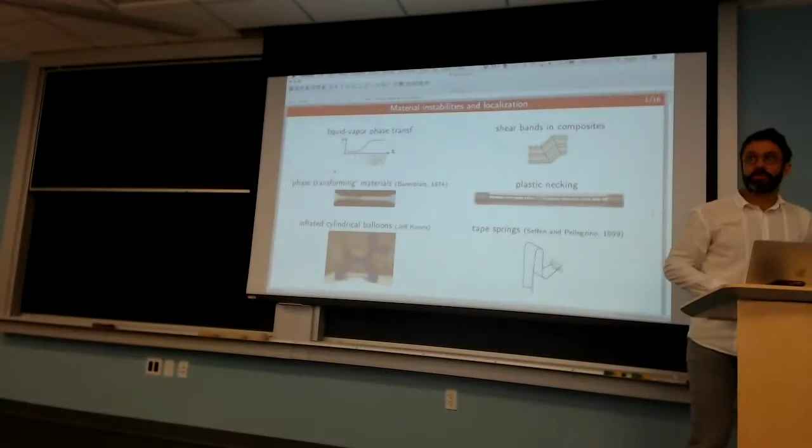Today's the last day where I'm dealing with moving out of my old apartment. It's not the same as the last day where I'm moving into my new apartment. There's just boxes everywhere.

So you already have the new apartment? Yeah, it's on Marine Road, just a block north of the 210. It's like a 15-mile bike ride.

What program do you use to make your slides? TeXmacs. TeXmacs, which I like.

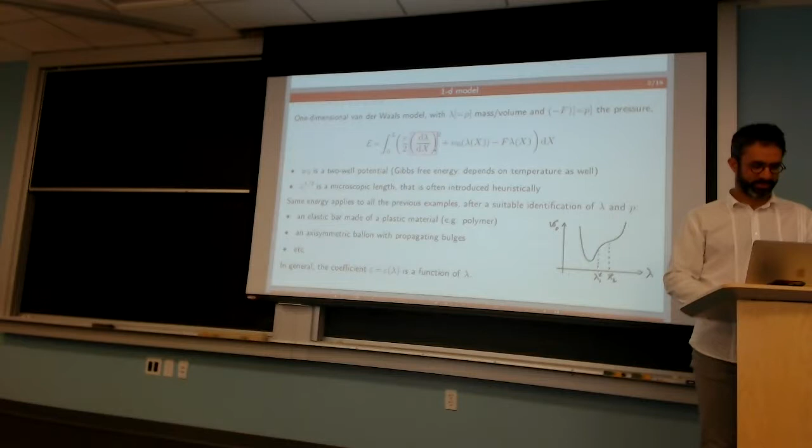The nice thing is that you can edit as you type. Is it just for Apple products? No, it's so you have accents.

Basically, it's a guy who rewrote LaTeX from scratch to make it interactive. It's not LaTeX, but the philosophy is quite similar. Everything is basically LaTeX, except that you have access to all the boxes, and you can make consistent selections that will always span a given level.

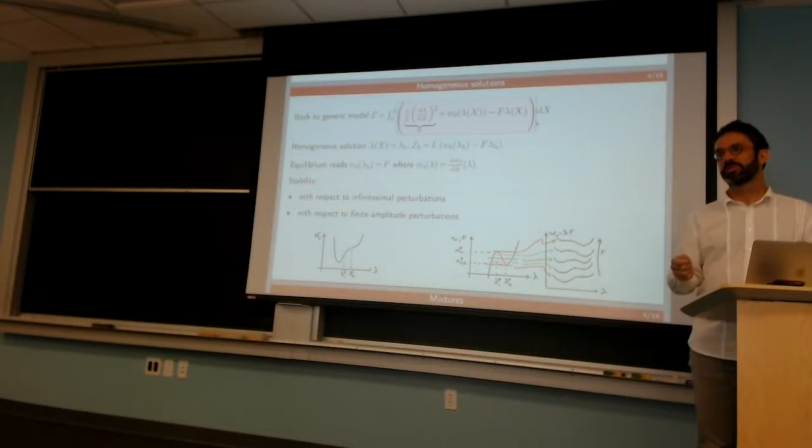When you write LaTeX, most of the time you're spending, when you try to do copy paste for instance, is identifying which level of thing. So yeah, it's really nice. I started using it, and now I'm almost converted.

It's also very nice for tables, because tables take alignment, and everything is handled automatically. But I'm using it for the first time for presentations - I use it most of the time for write-ups.

It's called TeXmacs, but Max is not Mac - it's like Emacs, so it's more of a unique thing. Actually, the weakest part of the software is the interface, which a different guy wrote, but the engine is incredible.

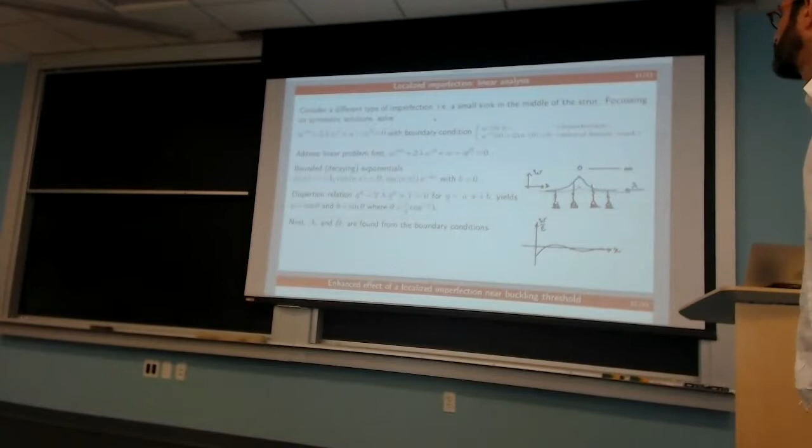I think I'm going to finish the lecture from last week to start with, which was about imperfection. It's loosely connected to the main theme of today - not strictly necessary, but nice to cover.

Remember last time we had the equation for a strut on foundation, where lambda is the load parameter, which is the pre-stress here. We were asking what happens when you have an imperfection. The idea of studying imperfection is that we're looking at a system that can bifurcate, so has zero stiffness, and there's a possible interaction between the imperfection and the bifurcation.

We use a nonlinear equation that's a simple way of capturing a system that can buckle, with an imperfection in the boundary conditions representing a strut that has a small kink. Epsilon would be a slope here, and then we need an extra boundary condition, so we just use the natural one.

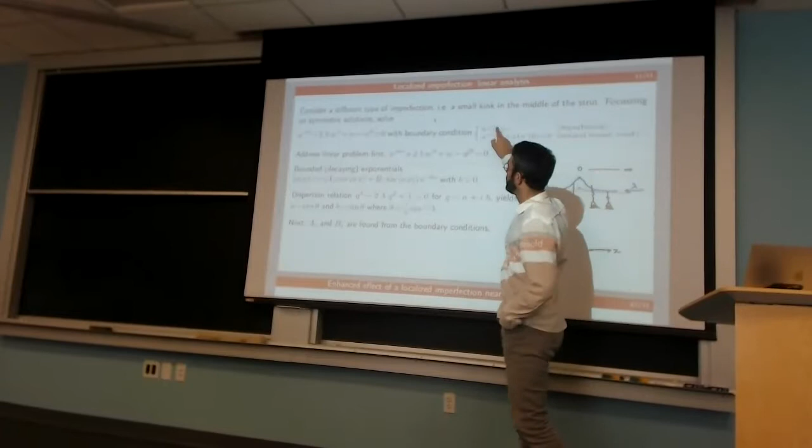Now we're considering a system assuming symmetry and considering half the domain, so the imperfection is in the boundary condition - that's our epsilon. We said we could start analyzing that by linearizing, which makes sense because epsilon is small. If you do that, you get an equation with constant coefficients, and you find exponentials, cosines, and sines, so you have the solution in this form.

So you can write the dispersion equations, etc. Typically that's the type of solution you get - you have the initial imperfection here that damps out away from the origin.

Now what's interesting is if you go to values of the loading parameter where the system spontaneously buckles, so taking lambda close to 1, you can analyze this solution. The important thing here is that the B parameter, which gives the decay length of the solution, is going to 0. So B is the inverse of the length.

Remember, eta was the expansion parameter in the Koiter expansion, and here we are with a symmetric bifurcation. In that parabola for the perfect system, eta would be the arc length. So the increment of load, which I measure on the y-axis on the bifurcation diagram, is the square of eta. So this eta here is just the square root of the increment.

So B, you can analyze, there's an explicit solution, so this B goes to 0, like square root of 1 minus lambda. So square root of distance to threshold, which I call eta.

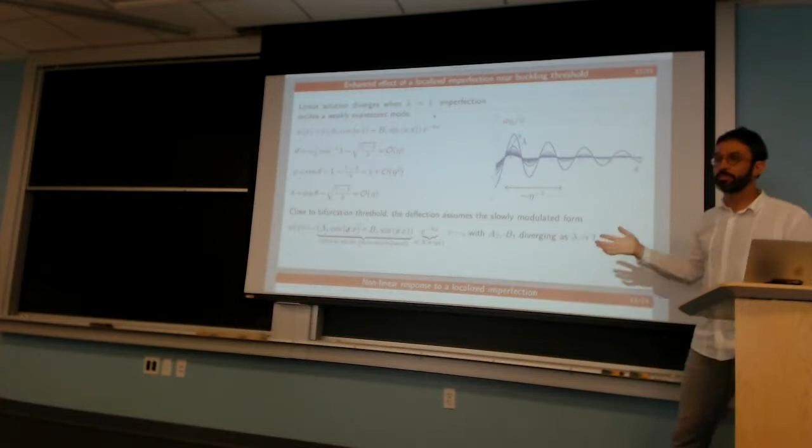So it turns out we've discovered this particular form of the solution in one example, but it's actually a very generic feature of systems that have an intrinsic length scale associated with buckling, that's the x here, and are much larger than this wavelength.

So we call that extended systems. Extended system is systems whose length L is much larger than the natural wavelength.

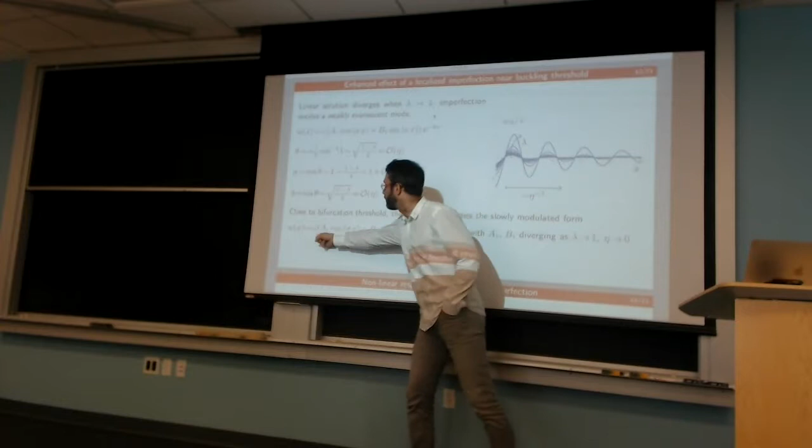And whenever we find an extended system, it will be, we'll see, I can give you a few examples that it's not sufficient to take the local buckling mode when you do post-bifurcation analysis. You must also remember that this buckling mode can be modulated by this slow variable.

Okay, so now I switch to the nonlinear analysis of this imperfect strut. And I could continue this reasoning and do the Koiter analysis, and well, this would be along the same lines.

But actually, I'm going to shift a little bit and use that idea of modulated solutions and port it to a slightly different context. So I'm now changing gear a little bit. And this idea is really at the core of localization.

And then as you compress more and more, you see that it tends to localize. And that's really the type of phenomenon that we can capture by this amplitude equation. I'll show you it's a simple generalization of the ideas we've just seen.

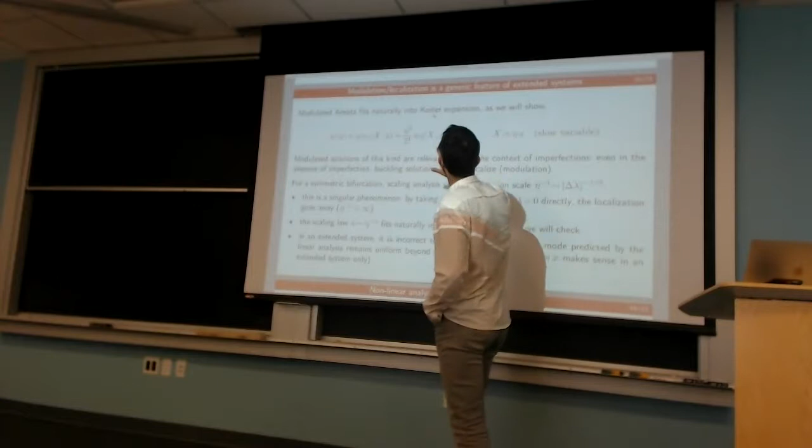So the idea here is that we seek the solution to our post-buckling problem in that special form, which is, again, specific to extended systems. In the extended system, we have the original variable x and the slow variable capital X. So capital X would be like that, where eta is our expansion parameter, you probably remember.

And if you want, in a non-extended system, we just have this. So now, this term will be essentially the one we just found, right? So this would be locally the buckling mode that depends on x times an amplitude that depends on capital X.

So that's the form we want to try in the Koiter expansion. So we generalize the Koiter expansion with that type of thing. Now you'll see, well, you have to think about it, how the expansion should be continued, but you can either do some test or some reasoning. Essentially, the expansion continues like that.

So the only difference with respect to earlier is that we introduce an additional dependence on this variable x, which is ultimately related to the original. And again, that holds beyond the context of imperfections.

I'm going to show you that even for a perfect system, it makes sense to use this kind of expansion, and you'll see the type of phenomena that are connected. So let's take this particular case of symmetric bifurcation for the strut, for instance.

The analysis we've just seen suggests we should use this form of the slow variable, so that we have a scale which is the inverse of our bifurcation parameter eta. As soon as you see this expansion, you see we're really addressing singular perturbation, because if you take eta goes to 0 here, this term would be 0, which doesn't really make sense. The passing to the limit is not a simple process.

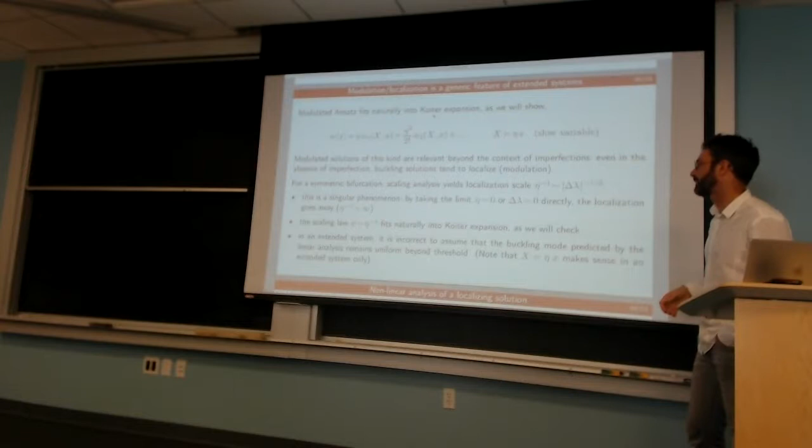So the point is that we had not considered that earlier, but that form is really what you want to consider in the Koiter expansion, and it fits naturally in it. Also, it's actually incorrect in extended systems to ignore this term, which you would naturally do because it seems to make sense. So let me proceed and show you now.

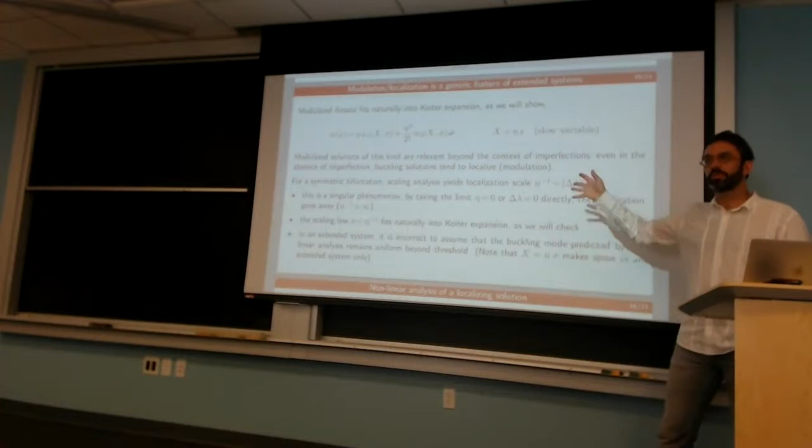So, Sergio asks: the W1 you might find as an eigenvector, for example? I'll come to that later, so it's a little abstract now. But essentially, W1 is going to be an amplitude depending on the slow variable times the local buckling mode depending on this one - pretty much like what we had.

The W2 also comes from analysis? Yeah, by pushing the expansion to higher order.

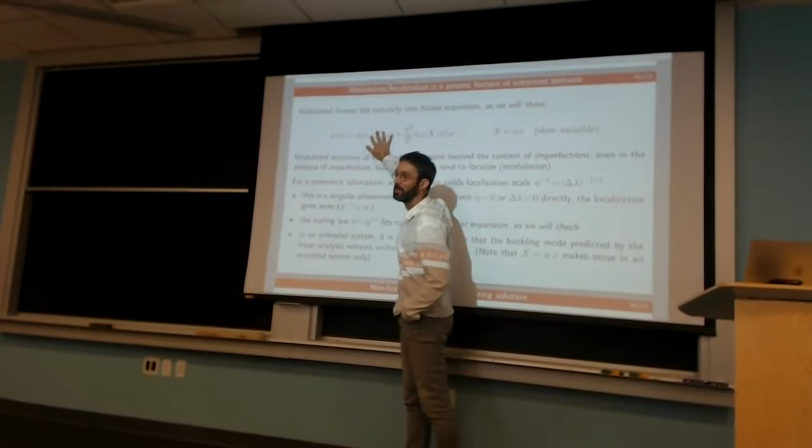And that's exactly the point. In the previous lectures, we were solving this order by order, but we didn't have the capital X because we were not considering extended systems. So that's the Koiter method, which does the linear stability analysis here, and then has corrections here, and you can also calculate the amplitude and so on. So that's the Koiter method, but now extended in the presence of this slow variable.

Okay, so let's take this system again. We are back to the perfect system, and I'll show you that this expansion is relevant here too. We use the equations of equilibrium, with this expansion of the load as before, and now this new expansion of the solution.

So what's new now is that the derivative of W with respect to X, which we did in this model - I wrote prime here - involves different terms. I need to take the derivative with respect to lowercase x here, and this has two terms. One term comes from here, which I denote as dW1 over d... I'm not expanding this, I'm just introducing notation for the moment. I call dot the derivative with respect to the slow variable, and prime the partial derivative with respect to the fast variable. When I need to calculate this, it will have two terms, one coming from here and one from here.

And that's actually written here. So this term, when you take the space derivative, has two contributions. But the point is that the one depending on the slow variable gets multiplied by d uppercase X over d lowercase x, which is eta. So that puts this second term one order further. These are the two pieces coming from here, but they are shifted - one comes at the same order as before, and this one is shifted. It's just algebra.

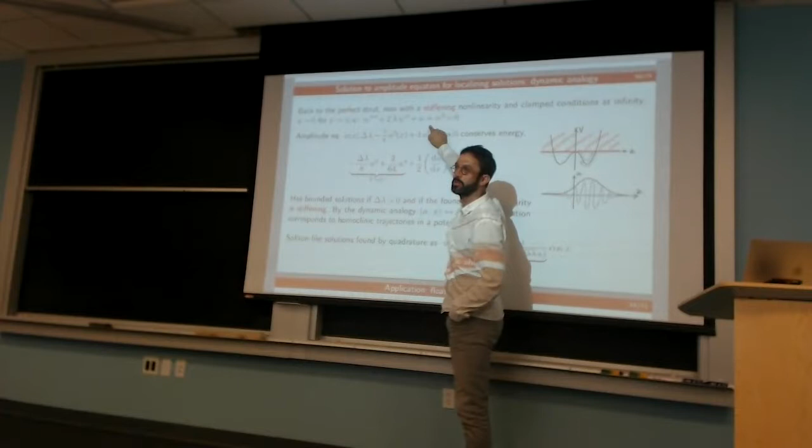Okay, so it's just a matter of solving this simple equation. And actually, I'm doing something now because it's more interesting. I'm changing the type of nonlinearity in the spring. So I'm going from a softening now to a stiffening nonlinearity.

So if you look at what's happening, it changes the coefficient here. And we have a modified version of our amplitude equation.

And this equation, you recognize, really looks like the equation of motion of a particle in a given potential. So that would be the acceleration term, and so that's connected to the potential. Right? So you can actually, that's called the dynamic analogy.

So to solve this equation, we can use the analogy and then notice that we have a conserved mechanical energy that's made of kinetic energy and potential associated with this force. And so that's how the potential looks like.

And now we are trying to find, if you replace space and time, we are essentially trying to find trajectories in this potential. So what are we looking at?

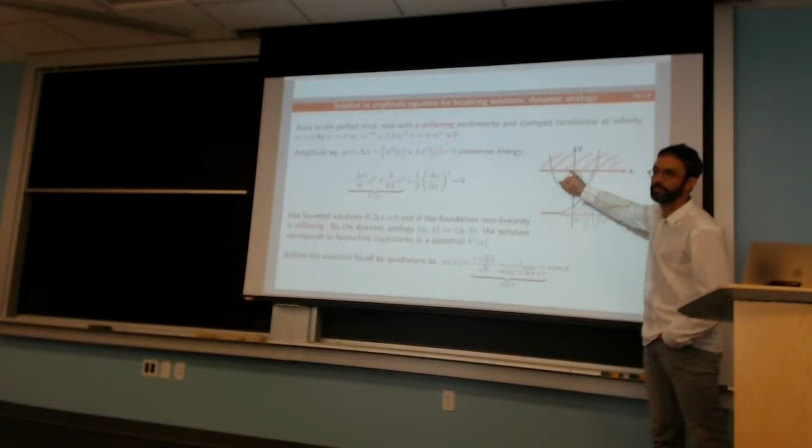We have to specify what would be the boundary conditions at infinity. So typically, if you think of the floating sheets problem, you expect that the oscillations damp out at infinity, corresponding to motions where you start from this unstable equilibrium, spend an infinite amount of time there, and then roll back and forth into potential. I think that's what you get. It's called a soliton in some contexts.

Okay, so you can solve this equation. You can do this by quadrature. It's just calculus. And you can have an explicit expression for that, for the A, which is this thing.

So this thing is just the envelope that you see here, and it's the motion of the particle. And remember, that was the amplitude which we need to multiply by the cosine thing, which is the local, given by the regular mode.

So at the end of the day, that's the solution of our buckling problem. That's the strut on the stiffening foundation. And so this is the solution. Again, you see that there's a length scale which is fixed and set by the linear buckling analysis. And there's another length scale here, which is the inverse of that guy. And the very important thing is that this depends on the buckling load.

So if you go near the threshold, this could go to 0, and the length scale is infinite. So you have something which is uniform, and as you move away from the buckling threshold, that localizes because this increases. So the length scale associated with that is smaller and smaller.

And on top of that, you have an extra dependence on the buckling load, which is the square root, and that's the classical amplitude which you expect for a symmetry bifurcation.

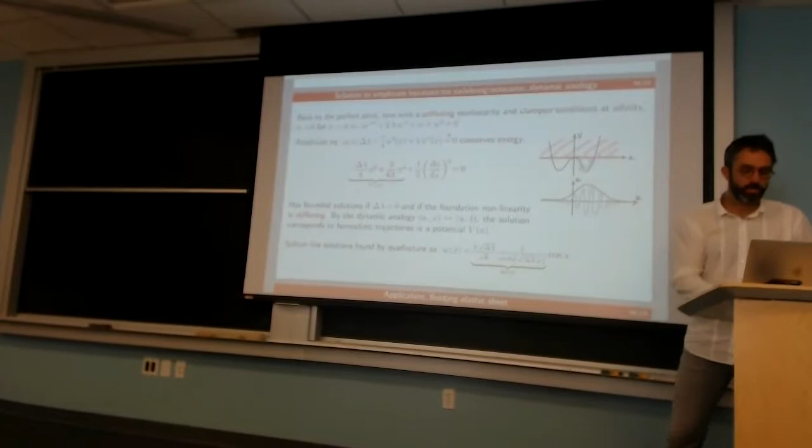Okay, so this solution does two important things. As you move away from the threshold, it increases in amplitude, but it also focuses more. And that's exactly what you see for the sheets here. Increasing amplitude, and it localizes more. So all that comes from a straightforward, or natural extension of the Koiter analysis.

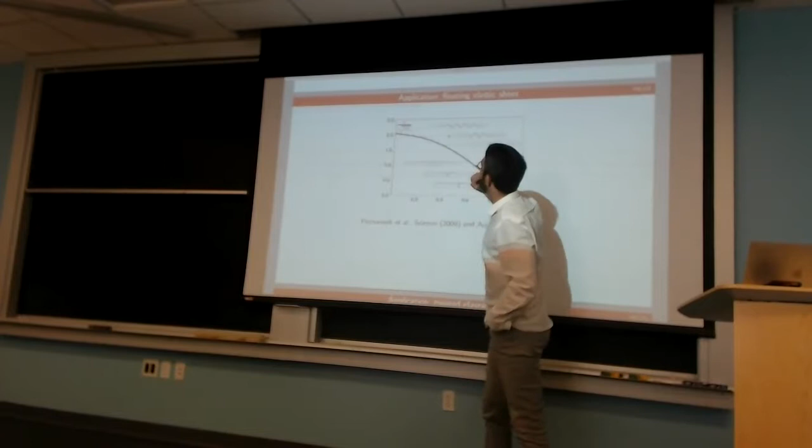So then these people had a science paper showing, based on numerical simulations, that you can correct. Well, they were essentially characterizing the displacement force for this system, and they get this parabola, and the parabola is just actually a direct consequence of this equation. So it's fully in line with what other people have done, not in this fluid context, but in what's called localized.

And when you know these solutions, and when you know that localization is possible, there are many other systems that actually localize. So this example is numerical simulations we've done on a knot that slides on an elastic rod, and then we were applying twist, and we were observing that at some point, if you apply some twist, it stops to rotate by a large amount.

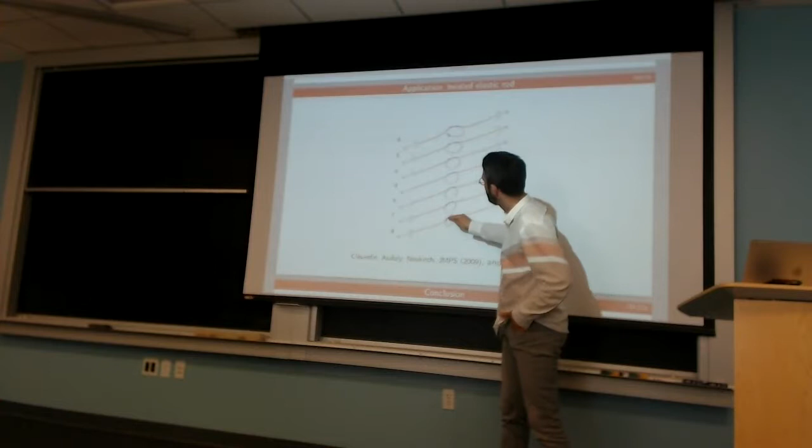And actually, this can be understood as a very similar system as what we had before. So the only thing that the knot is doing is introducing an imperfection, because when you want to enter the knot, you need a small angle to get into the loop and connect with the rest. So the knot is really acting like, you can erase the knot and replace it with a small kink here. And you can calculate the kink angle by looking in details at what happened here, but that's mostly irrelevant. And so now we have a twisted rod that has a small kink. And it's exactly like the strut on the foundation that had a small kink.

Remember, when it's close to bifurcation, it becomes highly susceptible. There is the same. We have a torsional instability. It's possible to do helical buckling with a rod. And so when we are close to the helical buckling, this small imperfection triggers some large type of deformation. So it looks like a complicated thing, but it's actually very similar to the strut on the foundation.

What determines the size of the knot? Well, it's actually how much you're pulling. If you don't have friction, there would be how much pulling force you can apply. There's a simple energetic argument where you balance the bending energy which is in there with the pulling force, and you get the radius as a function of the pulling force.

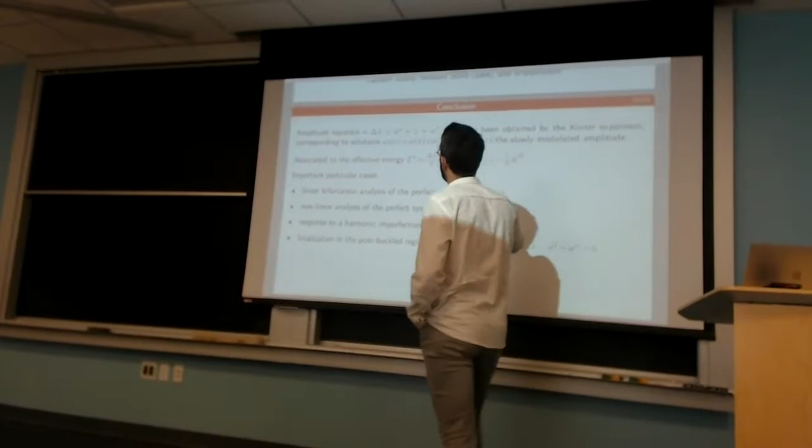So the conclusion for localization, and the next lecture will build on top of that, is the amplitude equation. We've seen many variants of this amplitude equation. The simplest form would be just two terms for how the amplitude depends on the incremental load with respect to the threshold. Then we had an extra term that accounts for imperfections, if you remember. And we have yet another term which accounts for modulation and localization in extended systems. But that's all derived in a consistent setting by doing this systematic Koiter expansion.

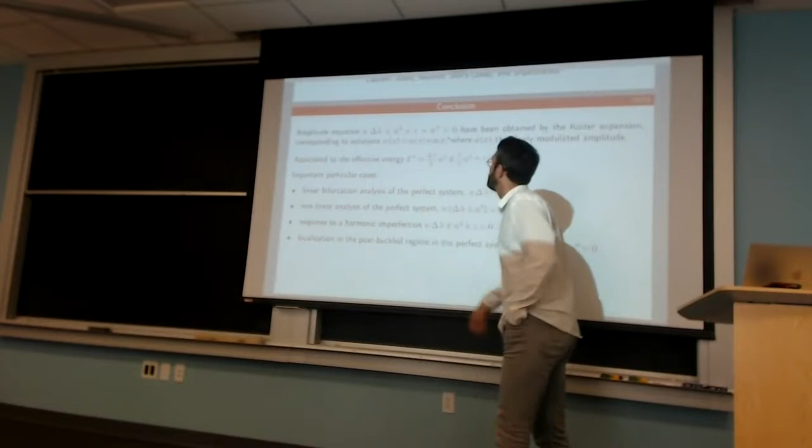And associated with that, there's a variational structure, so you define an energy and essentially solve a much simpler problem than the original one.

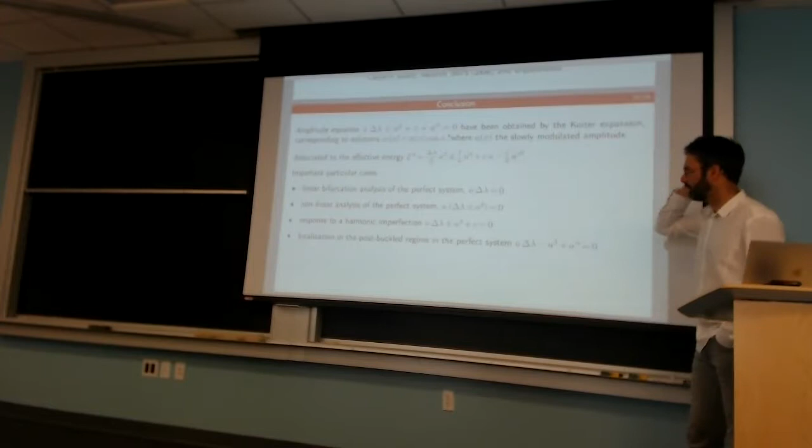And yeah, then essentially what we've done are particular cases of this equation. When you kill all the terms and retain this one, you find that it has a solution only when delta equals 0. That's essentially the linear bifurcation analysis, where I only retain linear terms. You can do the response to a harmonic imperfection, or you retain all three terms. That's what we did in the second part of the lecture, and then the imperfections.

Okay, so now on to lecture 5, and it's good because we've almost kept at the pace. So we're back on track for the next lecture.

I wanted to talk about material instabilities, and I'll give you here several examples of systems that tend to produce localization, meaning that they feature solutions that are non-uniform and different in different regions of space, with some interfaces or boundaries connecting to it.

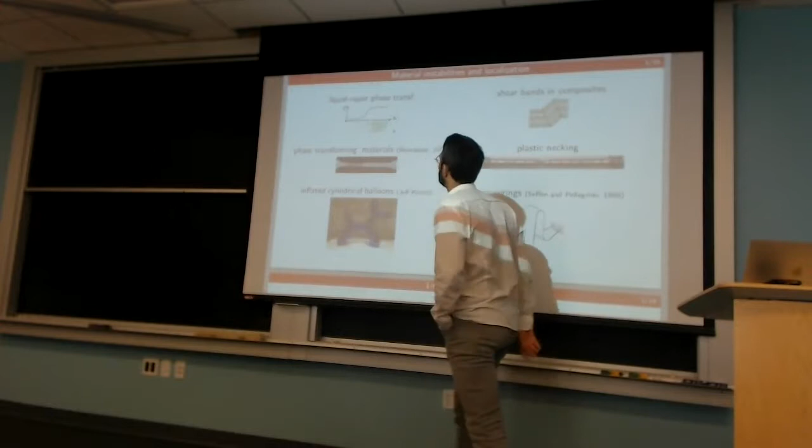One example is the liquid vapor interface, where we have a low density and a high density region, and on average you can expect something dependent on the particle density. You can find shear bands in composites.

Plastic necking, which is a bit of an extreme example of that, because as you start to go through localization and as you start to produce interfaces, you actually go to breakage.

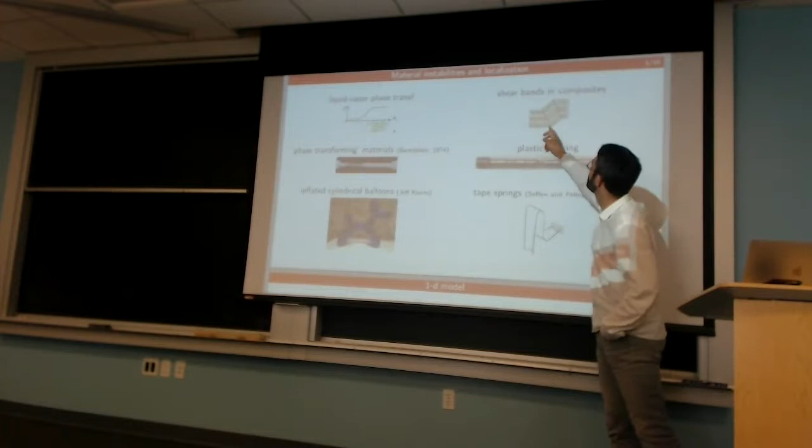There's this nice example of an old paper by Barenblatt, where they're just pulling on a rod made of polymer, and it's actually similar to a phase transforming material, where you're going to have two phases which are well defined.

But we all know of these party balloons, where, depending on the constitutive law of the balloon, typically what you get is two phases for some range of pressures: one that has a large radius, one that has a small radius, and a connecting region. And tape springs, which Sergio and other people have studied, where you have regions of high curvature and regions of low curvature that coexist. So all that comes from the same framework, basically, if you think mathematically.

So the crucial ingredient is some energy that depends on the local variable lambda and is non-convex. It has two wells. Typically that would represent the liquid and gas phases, if you're thinking of the Van der Waals model.

There's an extra load parameter that would be the pressure for the phase transformation, conjugate to this variable lambda. I'm not sure if I should speak of the liquid gas model or the bar model. I'll probably switch to the bar model, which I'm more familiar with.

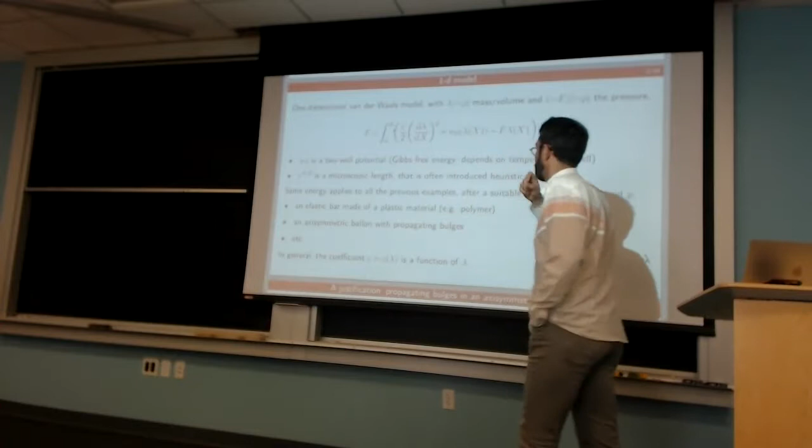So when you do that, this epsilon can be interpreted as the square of a microscopic length. Often people just introduce this heuristically. I'll show you in the next slide how it's actually possible to deduce this kind of model by using expansions.

And essentially that applies to all the systems here. We need to be a little bit more general, so we need to assume that this epsilon is actually a function of lambda. It's a minor thing, it doesn't change much, but it's relevant to many situations.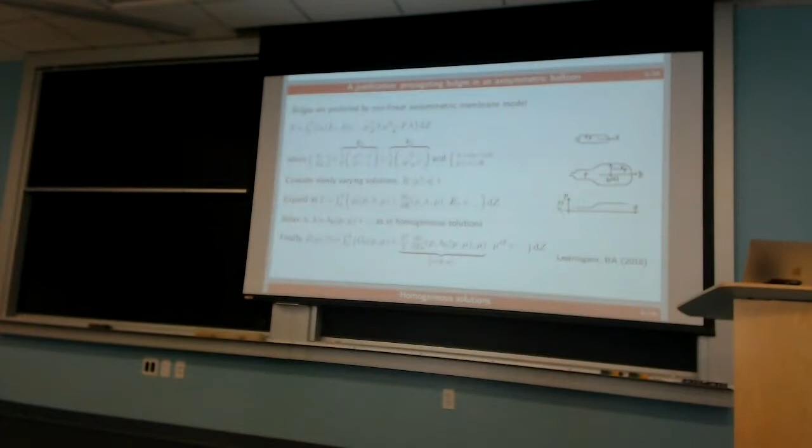So the first question is, how can we get this type of model? That's a paper almost submitted with my student Pierre Lestringant. The idea here was to start from

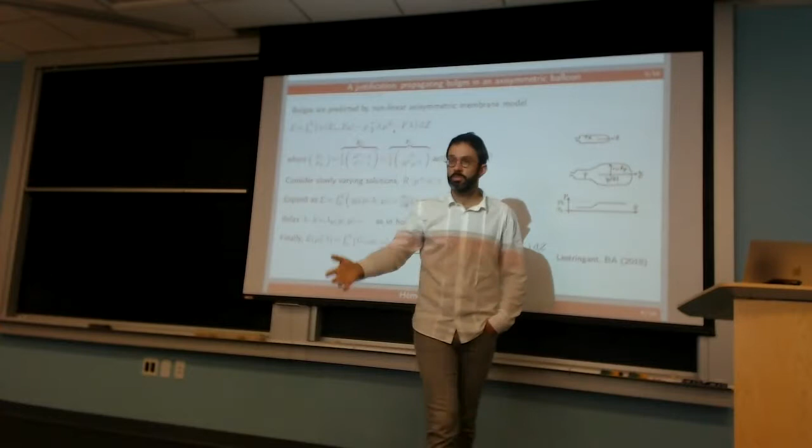a model for axisymmetric membranes, so that would be the balloon. People have used this model for axisymmetric membranes and simulated propagating bulges. But the question I'm asking here is, can we establish a connection between this model and the one from the previous slide?

Because that model has been extensively studied and is well known to lead to this kind of localization phenomena, it would be nice to not redo the analysis from scratch with a different model each time and just show that this model connects with the other one.

So this can be done. Let me first give you a few details on how this is formulated. The main unknown, so that's the reference configuration, that would be the deformed configuration. I take a point capital Z in reference configuration into a new configuration, which would be lowercase z as a function of uppercase Z. So that's my transformation.

And I also have a change of radius, which I quantify by mu. And mu is the hoop stretch, right? So that's the ratio of the deformed to the undeformed radius. So my two main unknowns would be lowercase z and mu as a function of capital Z.

Now the first thing I do is introduce some kind of stretch, lambda, which is this derivative. So that tells me if I project everything on the axis, what would be the stretch here. But that's not the true stretch, because the true stretch has to be measured along this direction. So that's kind of an effective stretch, right? And I have two strain variables now.

Now the membrane model is formulated by first looking at the strain measures for the membrane. So one strain measure is, well, actually the indices are reversed. I see that now, so how should I...

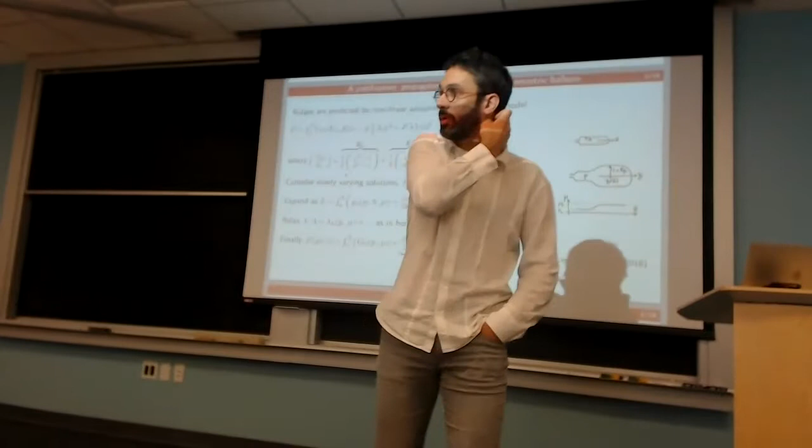In terms of strain, I can write the elastic energy of the membrane. That would be a finite elasticity model for the membrane. Then I add pressure times the volume. Volume is lambda d capital Z, that's the length of a small element. And mu squared is the change of area, so that's the volume. And that would be the pulling force.

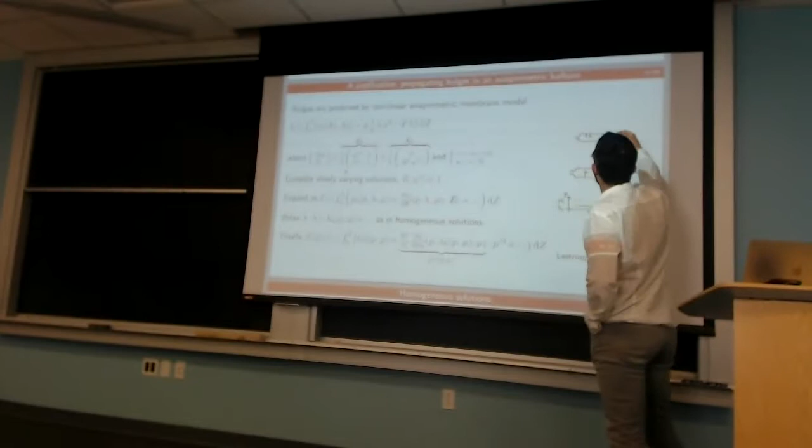Well, actually, in that setting, there are also pulling forces, and there are experiments like that which actually pull on the balloon, providing an additional control parameter. Okay, so that's the classical membrane model.

Now, the trick is to focus on slowly varying solutions. That's a debatable approximation, but mathematically it provides a way to solve this by expansion. I say debatable because when you have a real phase boundary here, nothing tells you that this mu prime is going to be small, but at least you can try and see what you get.

So in some sense, at the end, we need to verify that the solutions based on these assumptions are consistent with what we see in the experiments or simulations based on the full model.

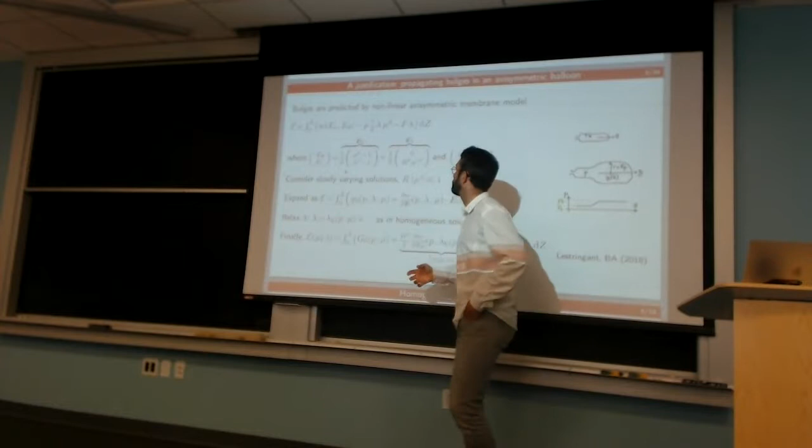Okay, so if you insert that into here and expand, you have one part that only depends on this thing, so that's considered the dominant term. You put it in here, and all this then becomes a function of lambda. And that's typically exactly what you do when you analyze homogeneous solutions, uniform solutions, which is what people usually do at an introductory level for the balloon.

And this is G naught, so it's a potential. But then you can also take this as a correction and expand this around it as a perturbation, and that's what you get. You need the gradient of the strain energy with respect to the strain, so that's called the Piola-Kirchhoff stress, times this correction, which is essentially mu prime squared.

Okay, so now we have a nice model, but you can see that this one is essentially mu prime squared. There's no derivative with respect to lambda, so it would actually be nice to get rid of lambda, so you can relax and do an optimization with respect to lambda.

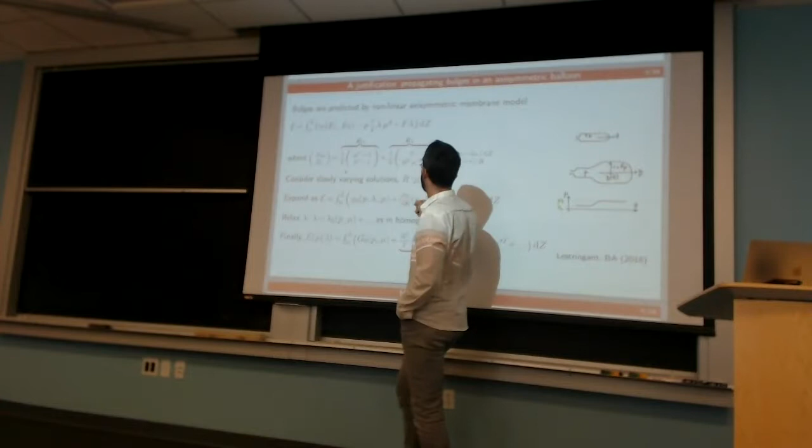And what you find here is that to first order, you want to cancel the gradient of this, and then you have corrections that come from that. But essentially, lambda must be found by the condition that the gradient of this with respect to lambda is 0. And that's again exactly what you do when you analyze homogeneous solutions. So you can estimate this lambda as being the one predicted by the analysis of homogeneous solutions. And then you can just insert this expansion into this one, checking the orders, etc.

And so with lambda given by this formula, this is now a potential that only depends on mu.

Don't you have multiple solutions?

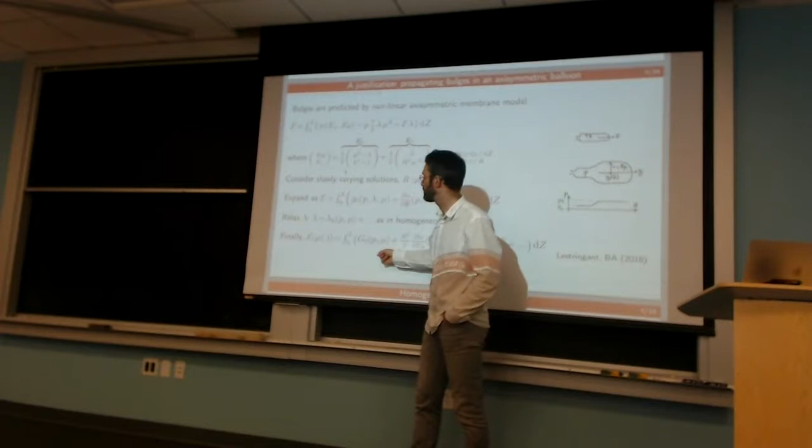If you do that, you end up with this potential, which you can predict, as basically everyone knows, by the analysis of homogeneous solutions. But now the more interesting part is that you have an explicit form of this thing. This is the Piola-Kirchhoff stress in the homogeneous solution, which is not so difficult to estimate, and it gets multiplied by mu prime squared. So you have an explicit expression of what your regularizing term is here, if you switch again, u and lambda.

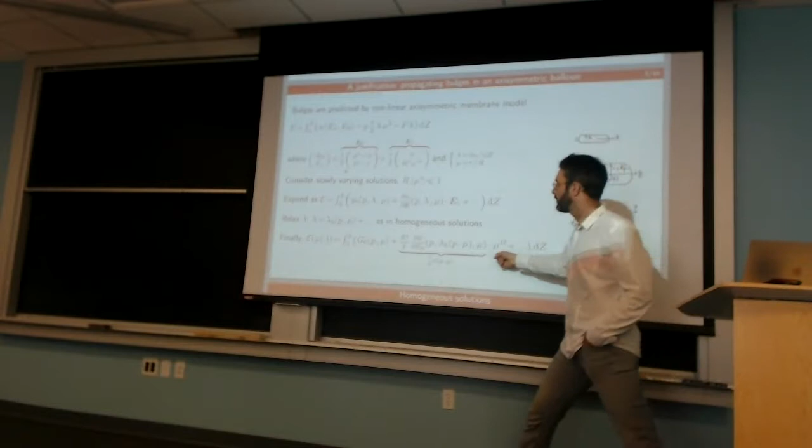So that's one example where you start from a specific system, and by doing some kind of expansion, you can actually prove that. We were the first ones to be surprised by this. If you use this model, based on this approximation, to simulate well-formed bulges and relatively sharp interfaces, it just works remarkably well. It's very difficult to see the difference between the solutions from the original model and this one. This approximation, I don't know exactly why, but it works really incredibly well.

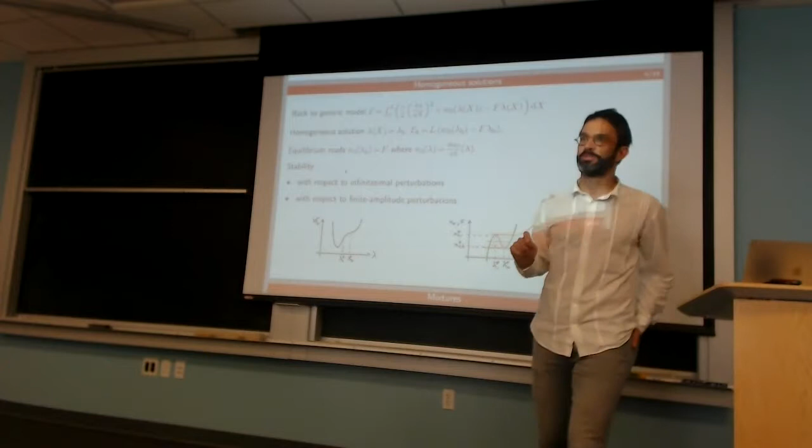Okay, so now let's go back to this model, which I now view as generic for all these phenomena, and try to solve it and see what its solutions would be in various ways. So the first thing we can do—probably some of you are familiar with that, not sure. So I'll assume not. Who has seen that before?

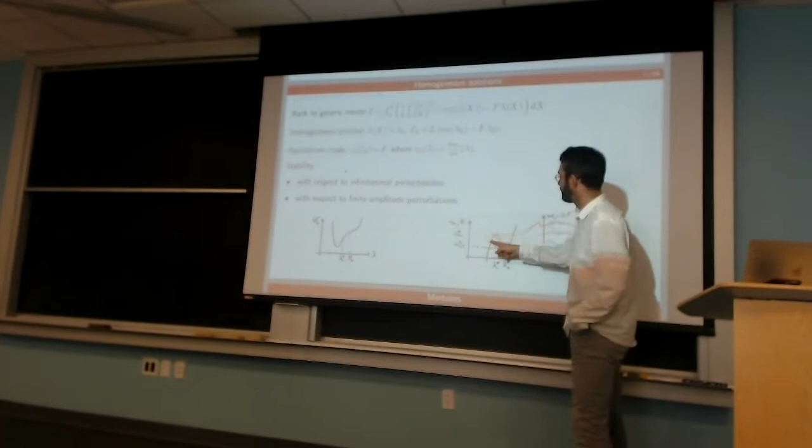Again, this potential is given, so you can plot the derivative, and typically it looks like that when you start from that. And all these curves correspond to homogeneous solutions.

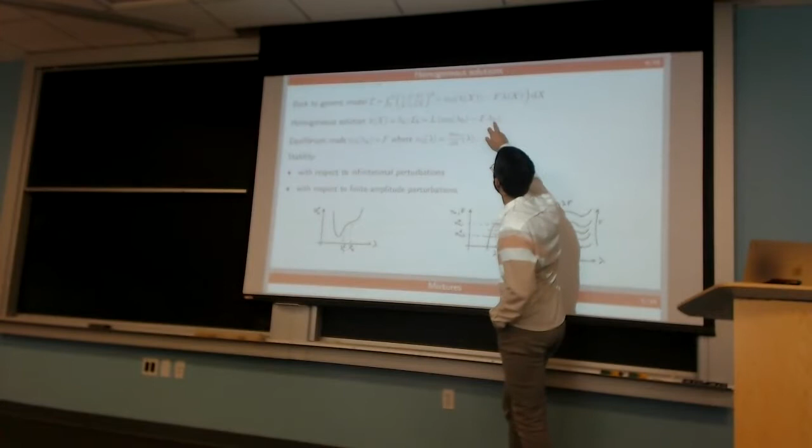Now you can ask whether they will be stable. Stability just has to do with—at least if you want, for stability, we start by looking at homogeneous perturbations. So the question is whether this is a minimum or not. It's relatively simple to do, and it can actually be discussed graphically.

I forgot to mention that this has a simple interpretation. So n naught, being the derivative of the strain energy of my bar, would be the internal force given by the constitutive law. If I specify a material model W naught, I get this as the internal force, and then the internal force has to be balanced with the force on the plane. So that's an equilibrium of the bar.

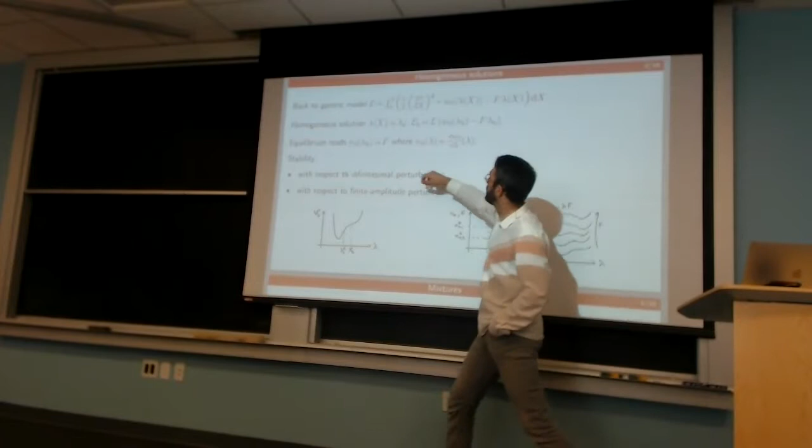Now I can look at what the total energy looks like for different values of F. So now I'm changing F, which is the imposed force, and I'm picking the corresponding lambda that's sitting on the curve, and then I'm plotting this curve here, which is the total potential.

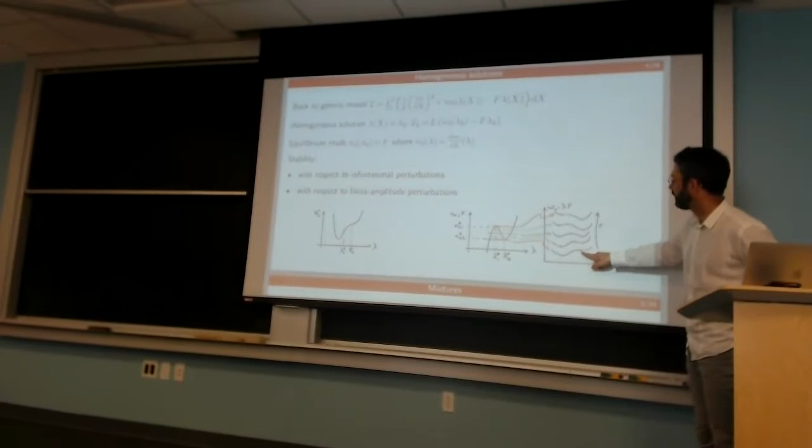If you think about it, you go from a situation for low lambda, where you look pretty much like that, where you have a minimum—and that's a second equilibrium which is just appearing because I'm reaching this point here. So this one is a minimum, represented here in green. And I have another equilibrium appearing. For intermediate values here, I have one minimum, one unstable maximum, and one local minimum.

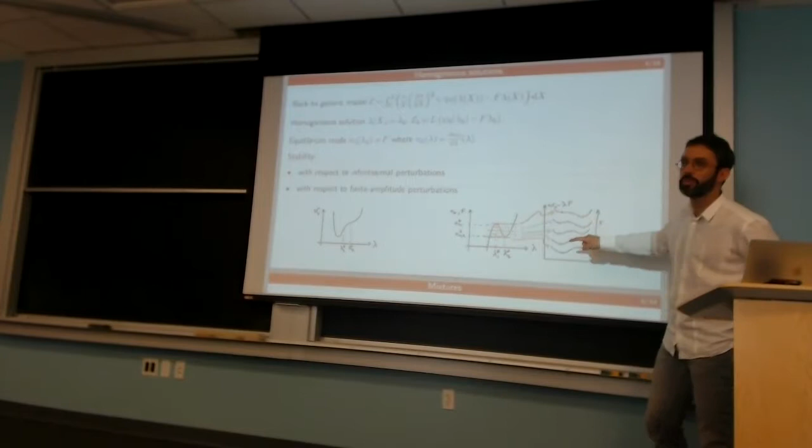So green here would be the absolute minimum. Purple would be a local minimum, but not the absolute one. Red, which are the central solutions, would be unstable maximum, etc. So bottom line is that what you expect to see in real experiments are these parts, which are definitely the absolute minimums, and these ones, which are metastable, but not this one.

Okay, now the next step, once we've done homogeneous solutions, is to remember that we are looking at systems that typically have different phases. So a typical solution that we expect for lambda would look like that. The first thing is that we are forgetting about the interface, and we look for solutions this way, so we ignore the gradient term.

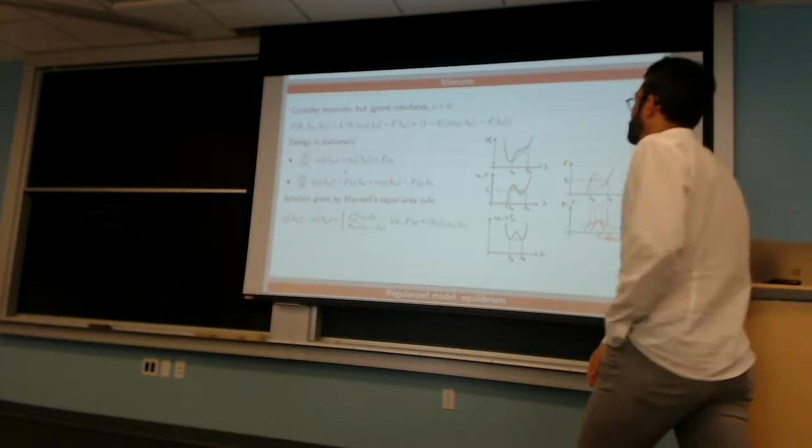It's called the non-regularized model, and then the energy just looks like that. So theta would be the fraction of what is in phase A, so then 1 minus theta is in the other phase, and that's what my energy looks like here. If I ignore this term for the moment, I will restore it later.

And integrate that with the fractions theta and 1 minus theta. So now I have a new energy which I can try to optimize with respect to the fractions and the two lambda A and lambda B. Just by requiring that this is stationary with respect to lambda A or lambda B, I find the same conditions as before, so that the local internal forces in every phase have to be equilibrated with the external force F. I'm calling Fm the solution of all these systems.

That's the condition with respect to the lambda i's. I should also find some kind of chemical potential where I'm requesting that the energy is stationary when I change B into A or vice versa. So that's the optimization of theta, and the condition I get is this one. I find that this new potential here in phase A has to match the potential in phase B, which is an extra condition. So now I'm looking for solutions lambda A, lambda B, and theta of these three equations.

And it can actually be done graphically, and it's quite nice. It's known as the Maxwell construction. So we'll assume that lambda A is smaller than lambda B. We want lambda A and lambda B to match the same force F by this equation. I didn't try to use lambda here because we know it's a phase which is unstable -- that would be sitting on the maximum of energy, and you can easily show that it makes everything unstable. So I'm purposely picking lambda A and lambda B on these two branches.

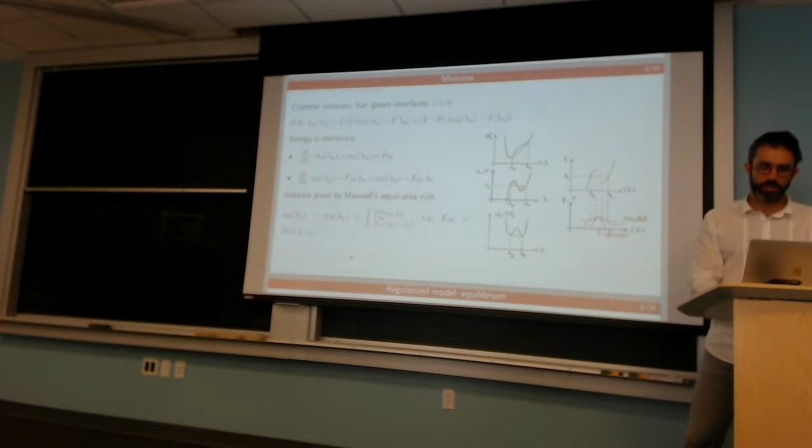Okay, so now we have characterized mixtures. We have one special value of the force called the Maxwell force, and that's basically all we can say in this non-regularized model where we have to take epsilon to be 0. We are ignoring interfaces. One drawback of this model is that it completely ignores interfaces, and the only thing we can characterize is the concentration of A and B. There's no way we can tell where A and B are in space. Since there's no penalization associated with phase boundaries, this model could predict that you have infinitely fine mixture of A and B, which is not typically what we see.

So in other words, a notion that's missing here is the notion of surface tension, and for that we need to restore the epsilon.

Okay, so let's go back to the regularized model and see what would be its typical features and what we can learn by restoring this term, building on what we know from the approximate analysis of the previous slides. You can do the calculus of variations, the virtual work, and derive equilibrium equations for this system. There's an extra complication which is often not accounted for, because of this dependence on lambda you have extra terms here, but you can do the math, and typically that would be the local equation of equilibrium that needs to be solved for that.

You can expand the derivative and write this form. This form is like before, when we ignore epsilon, so that would be the local equilibrium in the homogeneous space. And then we have the gradient effect here, which adds two terms, so my equation of equilibrium is no longer an algebraic equation, it's now a differential equation of order 2, and I need to solve with two boundary conditions.

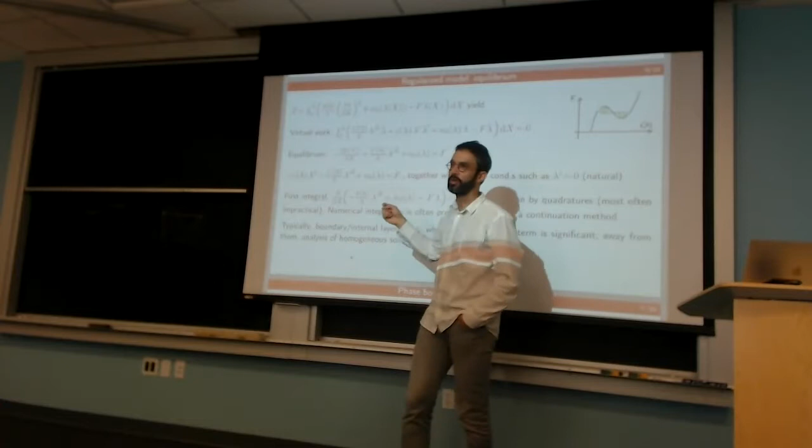Okay, so just a small trick that's useful for later: you can notice that this equation has a first integral. You can easily check that the derivative of this thing gives you that back. And well, it's not so much good news actually, because practically it's even hopeless to use this to construct the phase diagram. Because typically when you have the first integral, you would separate lambda on one side and f on the other, the d lambda on one side and the dx on the other side, and do quadratures.

But it doesn't work at all with this problem. So we'll spare that, we'll use it at some point, but it's actually a bad idea to try to use this to build that. Plain numerical simulations starting from that are actually much easier. The reason is that the integrals you end up calculating for this problem are close to a singular point, and it's just terrible numerically. So sometimes things that look nice and simple turn out to be not so nice for numerics.

Okay, and then typically what we expect is that we have internal layers, where things change relatively rapidly, where this term plays a role, and away from that, not really.

Okay, so let me now try to focus on something specific with this, with always the same model. I want to describe what's happening now in an infinite medium, because it's simpler, and try to describe it. Specifically, I'm looking for solutions that would tend to two different concentrations on the two sides of the domain, and see what I can learn from them.

Go back. Why did this invariant come from? Integrate twice. So I have a second order ODE, which can be integrated out with this invariant. Actually it comes from the variational structure. It's like the Lagrangian and the total energy, right?

Okay, so we recovered this equation which we know from before, and if you know C, you can extract lambda prime, and you can do this method of quadrature. Essentially, you have minus epsilon plus something that depends on lambda equals 0. So you can separate this out as d lambda over something that depends on lambda equals something that depends on dx, and if you do the math, that's what you get.

It's fine, so that's the quadrature method. You just have to integrate this, it's just an integral to calculate, and then you have the solution. So that I'm skipping, but essentially you can check that everything works fine, and you end up with this type of solution.

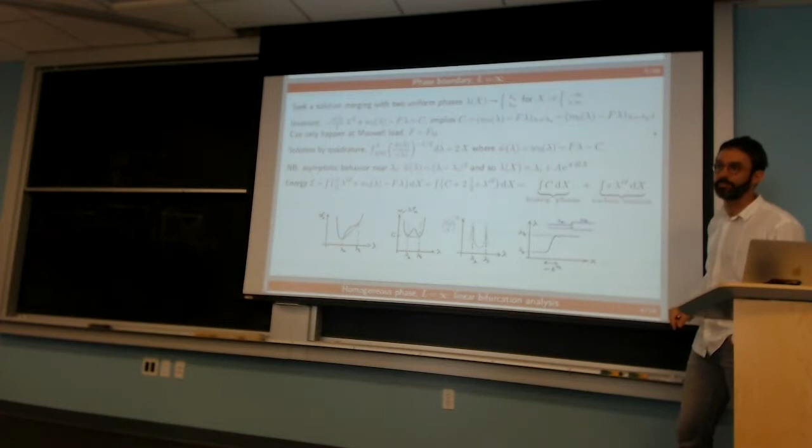Now we are in a 1D situation where the interface energy is just a constant. In 3D, that would be the constant multiplied by the area, which is the more familiar situation. So it's just a little bit special because we're working in 1D.

Okay, so we have surface tension in this model. Now we can try to do stability and bifurcation analysis. And actually, I realized only very lately that all the tools we've seen before with Koiter and things applies naturally to that and gives you a complete picture of this system, which is quite nice. So let's take an infinite medium.

Let me get back to the homogeneous phase, and let me ask whether I can do bifurcation. I don't have stability in mind because I can't really do stability, but at least we can see if we can bifurcate from that. So do we have neighboring solutions? Usually stability comes on top of that really easy.

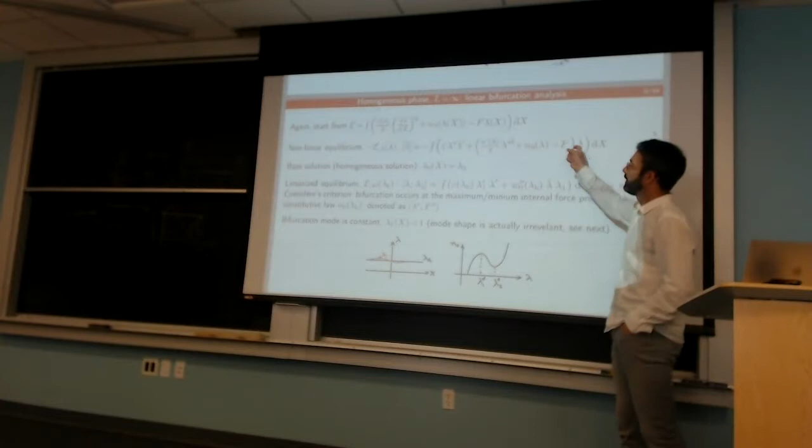So we start from the energy. We do the first variation, which is another way of writing the equations of equilibrium we've had before. We look at the base solution, which is now the constant, and we linearize the equilibrium as we did before. So now we have two linear increments, virtual change, real change, which I call lambda one, and that's the equation we need to solve once we put them in strong form. These are constants, they don't depend on x.

And you recognize a second order equation with constant coefficients. So if you integrate by parts, you have minus epsilon h lambda 1 second was the homogeneous solution, another coefficient times lambda 1 0. So you know that you have sine and cosine solution.

You know that the first solution that becomes unstable is the one with the longest wavelength, and here we're in an infinite medium. So actually the wavelength is going to be infinite, and the first bifurcation mode is just going to be lambda 1, so that's q equals 0, wavelength equals infinity. Okay, so it's a solution of this equation.

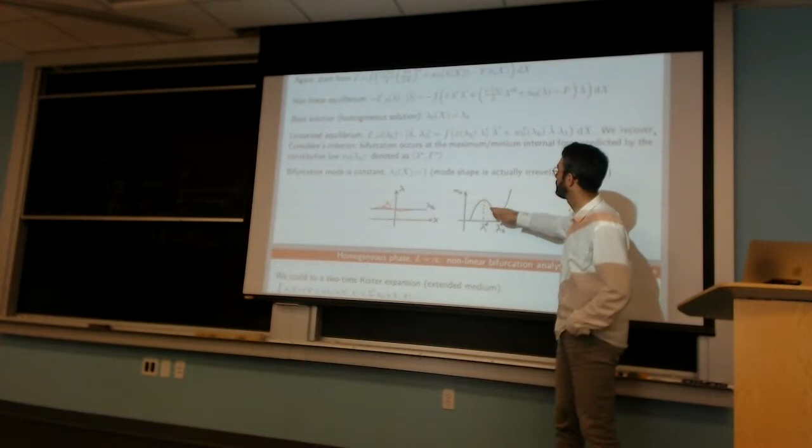And you find that this is possible whenever this goes to 0. So let's see where this happens. Well, this happens actually, so remember the derivative of W is called N0. So the second derivative is going to cancel whenever N0 is a maximum or a minimum. So it means that on this curve here, where we have the catalog of homogeneous solutions that can exist under different forces, we expect the bifurcation to take place here and here in the infinite system. Okay?

So you've seen the tools of nonlinear expansions, and we can now ask, well, actually, something we should say is that the buckling mode is not very informative, right? It's a constant thing. And actually we'll see that because we have localization and modulation, the actual mode shape is completely different from that. So that's not very informative. Okay, so we have a bifurcation point.

We can use the Koiter expansion and do the nonlinear analysis. We have to remember that we are in an extended medium. It's long, we are in an infinite situation here, so we could introduce a slow variable, do everything, and the calculation, and we have the rest. But actually, in the simple setting, there's a much more elegant and simple method that we can use. And so this is how it reads.

So take this, which is the energy of our system, and now we are trying to work and guess a branch from this point. So that would be F, that would be lambda. I use stars for the points where the bifurcation is taking place. So now I'm trying to build a branch here by hand. I don't want to use the Koiter method. So I'm just trying to expand lambda and F close to the point where the bifurcation takes place.

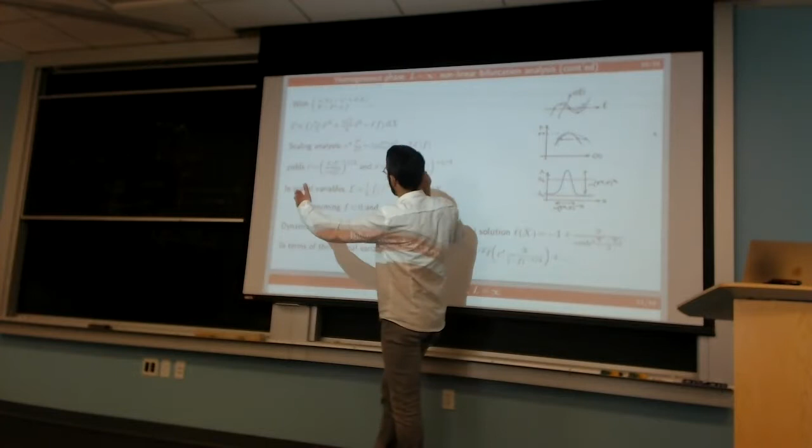So L would now mean the scale of L, and delta would be the scale of X. That would be typically my interface. So what do I get from that? This term is roughly, well, let me drop the factor of 2 here. This is the estimate for this term, that's the estimate for this term, and that's the estimate for this term. I've chosen to put the factor of 2 here because I wanted specific coefficients for my dimensionless formula, but you can forget about it.

Okay, now let's see. By balancing these two, you get the scale for L. Interesting is that the scale for L depends on F, which is the distance to the threshold. So I'm starting to get the amplitude of my correction, my perturbation, as a function of the distance to threshold. Recognize this? This is the buckling amplitude, it's distance to the threshold. We seem to be dealing with a symmetry bifurcation.

But more than that, I have this term which you might have recognized as our amplitude equation from the end of the last lecture. That's a modulation term, which we derived directly. That gives me a scale delta, which goes like that. And that's a very interesting way.

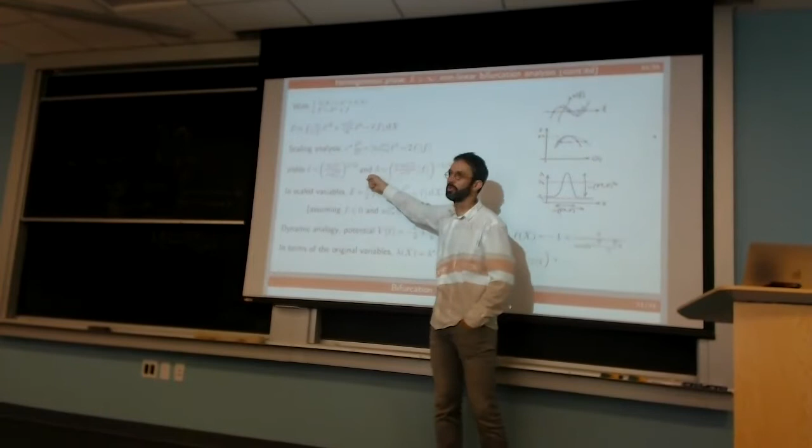Okay, so this is just the scaling. So I have a scale for L and I have a scale for X. And that suggests, as usual, rescaling. I'm trying to search my perturbation as the scale I've just introduced.

That would be by X, this one would be divided by the scale. So the usual business with scale. And the benefit when you rescale is that you get rid of all the coefficients. You have a simple equation.

So all these phenomena of localization boil down more or less to boundary layers at the end?

In some sense, yeah, it's related to boundary layers. In the same way you could define that inside a region you're going to have a certain dominant balance, and out of that you can get rid of other terms. Right. Yeah, exactly, that's a refinement.

Well, I mean, the trick here is that it looks like a boundary layer equation, and there's definitely a boundary layer or something happening here, localized. The trick here, which is not usually the case, is that we have some extra dependence on the distance to threshold. So things move and change in nature when you move away from threshold, and that's what's specific. But many of the ideas are connected.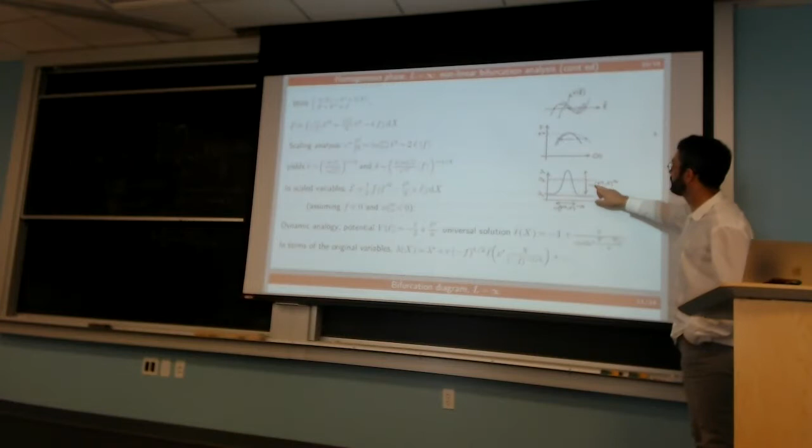Remember that's in scaled variables, so we've actually stretched both amplitude and the X variable. If you look at the real variable, this means the soliton has a height given by the square root of distance to threshold, and it localizes as you move away from threshold with that typical -1/4 power. That's something that localizes very quickly.

We start out very close to bifurcation threshold, you have something like that, and as soon as you move, as soon as you decrease the load, you have something like that, we have this.

So the last thing we need here is to see how this can be represented in a phase diagram. We want to include these solutions in the phase diagram, and since we're in an infinite system, let's use the average of lambda on the x-axis, so we can superimpose with the homogeneous solutions, and f on the vertical axis.

So the question is, we have this solution that's localized, what would be the average value of lambda? Actually, we are in an infinite medium, so everything is dominated by what happens here. You don't see this thing in the diagram, and the branch that corresponds to it, in this particular set of variables, is just superimposed on this branch. So with this choice of variable, we don't see the interesting thing, which is the localized solution.

Okay, so here is the picture we arrived at. We have this set of homogeneous solutions. We know that this part is unstable, and exactly at the point where it becomes unstable, there's a bifurcation point, and a new branch here, which you can't resolve in that set of variables, but it's nevertheless a new branch. You start here with the solution A.

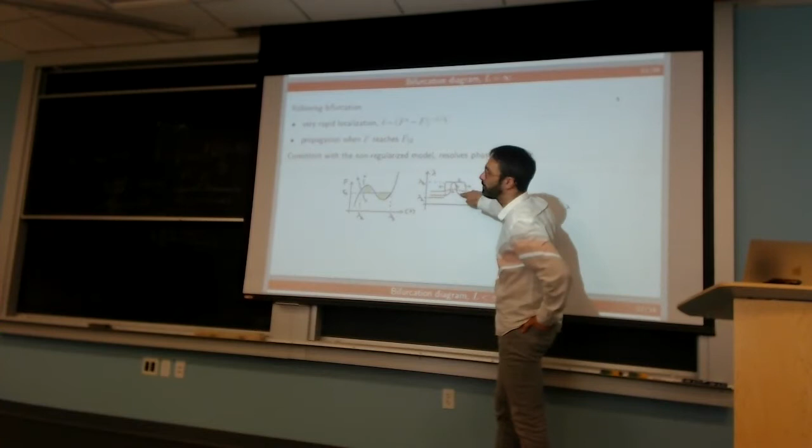This is a weakly localized thing, and very quickly, as you move, it gets localized, and that would be B. So it gets more localized, it grows in amplitude. And at some point, if you continue, you will eventually get to the Maxwell amplitude. And you know that at the Maxwell amplitude, we have solutions for interfaces that look like that.

What happens is that this solution B, when you get to the Maxwell amplitude, becomes propagative. So it splits, and then you get two fronts that propagate. As you move here, these two fronts move away from each other, so you increase the concentration of B with respect to A, and the average value of lambda departs from A and goes to that of B at this constant.

So you have localization first and then propagation. Does that make sense? Localization really sits at a given place, and propagation means that you have a significant fraction of B now in your set. And then the same thing happens on the other side.

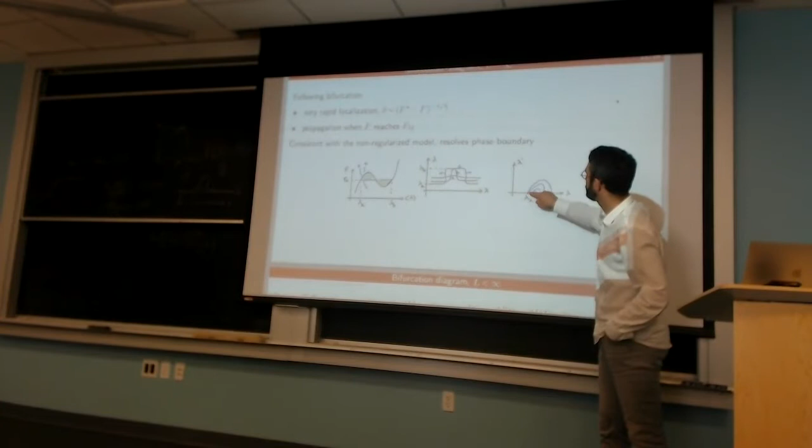You can visualize these things differently in this space, with lambda and lambda prime, two stable points, A and B, and as you increase the load, you trace out circles, that's a different representation.

Now the question: we've studied the infinite length scale case in detail. What happens now when I have a system that's finite? You need to specify boundary conditions. Easiest is to take the natural boundary condition from the variational formula, so you typically assume that lambda prime is 0 on both ends. I'll come to that later.

Just to give you an outline of what's coming next: here is what the phase diagram looks like, those would be these green curves, and this is typically what happens to the curve when the length goes to infinity. You get something like that for finite length, and that connects nicely with the infinite length case because everything gets squeezed into these corners.

So that's the typical shape you get. What actually matters is the slenderness parameter, the ratio of the actual length to the microscopic length, and that's really the parameter that matters. So when L goes to infinity, or epsilon goes to 0, you go from solutions strongly penalized by gradients that aren't so steep, to these sharp interfaces. That's your control parameter. Also in the system, there are different modes.

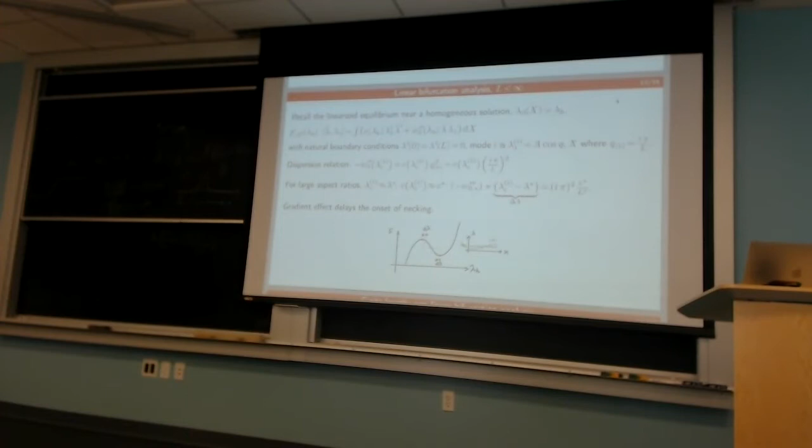So let's see what happens now, and if we learn anything else by redoing the linear stability analysis and the business we've set up before, now in this finite length case. You can do the linearized equilibrium, and you end up with the same equation that we had before. We put it somewhere. This one.

Same equation that we had before for the linear stability analysis, but now with boundary conditions. So I use specific boundary conditions, and you have modes in cosine form. So you can plug in this linear mode, you get the dispersion relation that looks like that.

So this is the coefficient which I have an equation here. This is the other coefficient I have in the equation, and that's q squared. That's the classical bifurcation equation. So you can restore. Actually, remember that for the infinite case, this was 0.

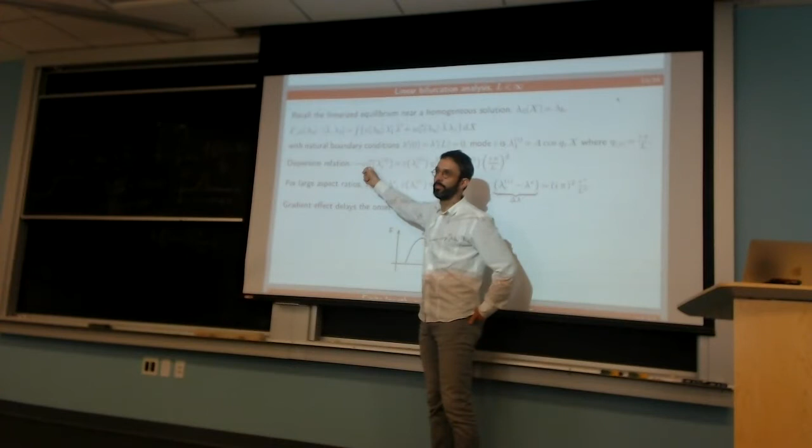And so you can guess that for a long bar, this is going to be small, meaning that this will have to sit close to the previous bifurcation point. So you can assume that you can actually expand this near this point here, which I call the Considère point. And because it cancels here, you can approximate as the third derivative times the increment of load here. This delta lambda now is how much extra load I can apply before the finite length system bifurcates, with respect to the case of an infinite system. So this equation connects the delay in bifurcation caused by the finite length and the length of the bar.

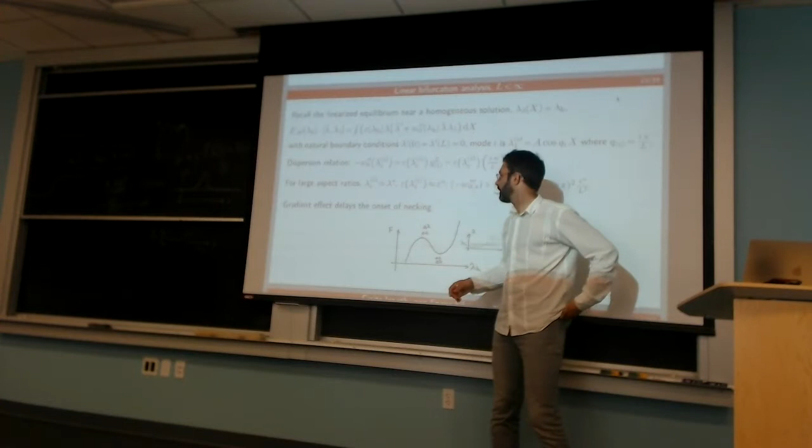You see that the delay goes to 0. So a typical effect associated with finite length is that you move the bifurcation point a little bit away into the zone that used to be unstable. So you restabilize a little bit of this region here. The region is restabilized because now it's finite length and there's an energetic cost associated with gradients. So the modes that you had from the previous analysis in infinite length are no longer relevant.

But other than that, we have this point here, and we have, let's say, the first mode here by taking i equals 1. You can do the analysis, which is now nonlinear. I'm going to skip over the details. Now it's a finite length system. We have a bifurcation mode whose wavelength is the length of the system.

It's not an extended system. We can only express one single wavelength. There's no point trying to introduce localization and modulating amplitude. It's a regular Koiter analysis. So you can do the regular Koiter analysis.

You can work on the details, and you find the initial slopes here. So it's a little bit surprising because it's a finite bifurcation, but you find it's a symmetric bifurcation, and you find finite slopes, but that's just because we are using a specific set of parameters. I'm going to forget about that. And it's the usual boring things. We've seen it so many times.

With all that, you can calculate the amplitude of buckling as a function of distance to threshold, and you end up with a formula. And there's no localization here. So you can find the start of this branch, and that's what you get. So it's not very interesting.

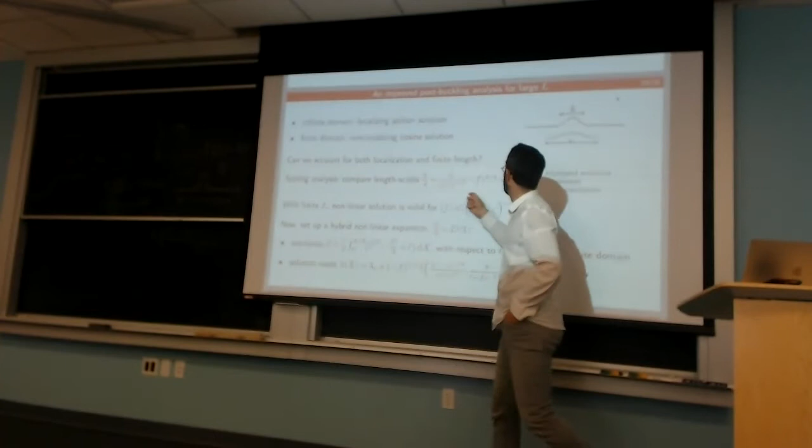If L is much larger than delta, then effectively our medium is infinite. That's the drawing I have here. And it's so much larger than delta that the actual boundary conditions I'm applying don't matter. If L is much less than delta, then this approach is probably fine. Now you can see that there's some intermediate regime which I don't think is known. I should check, but I don't think it's been studied, where both matters.

You can do some kind of improved theory where essentially you redo the previous analysis of the dynamic analogy, but now in a system with finite length, so in rescaled variables, the new x bar should not be larger than this number. So you can modify the solution we get from the infinite case to take this parameter into account. If you do that, you get a new solution that depends as earlier on the scaled slow variable, but now has an extra dependence on this extra parameter.

So it's another example, pretty much like in the boundary layer, with outer solutions, and we're trying to find an improved model that can handle both situations. If you do that, it can be solved. It's just a simple thing. It's a little bit painful to take into account the boundary conditions, but an explicit form of this can be found. And then you can reconcile everything.

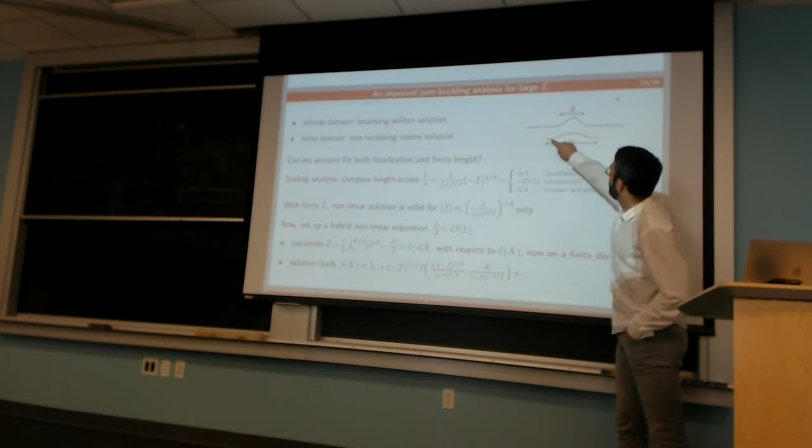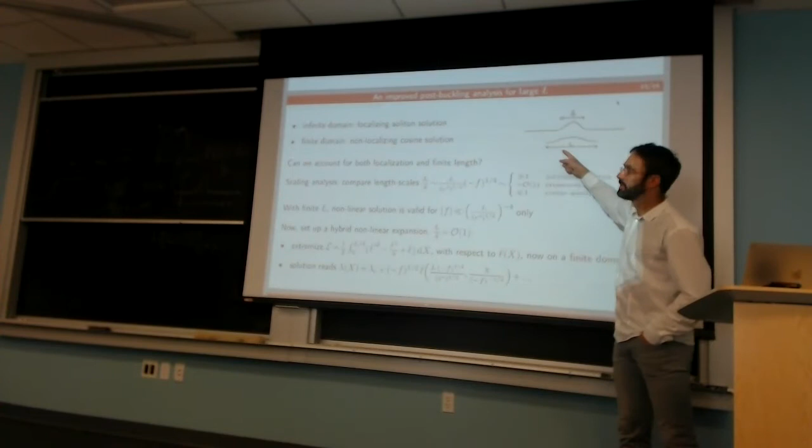So I think we've covered this diagram at length. What I like is that, well, first, it's completely general. It applies to many situations. But it's also a very nice playground for using these bifurcation methods, localization.

In particular, if you think in terms of classical bifurcation and you see cosine mode, it's hard to realize how that can connect to localized solutions. For that, the multiple scale expansions and these things are connected. So really the specific feature of this system is that it starts out here as a cosine mode and very quickly gives rise to interfaces as you move a little bit around this bifurcated branch.

So at the end of the day, the picture we come up with is a homogeneous solution that is stable here and here, a little bit past the maximum due to a finite length effect, an unstable region in the middle, and that bifurcated branch here that has localizing and then propagating solutions. If you look at stability, it's exactly what you expect.

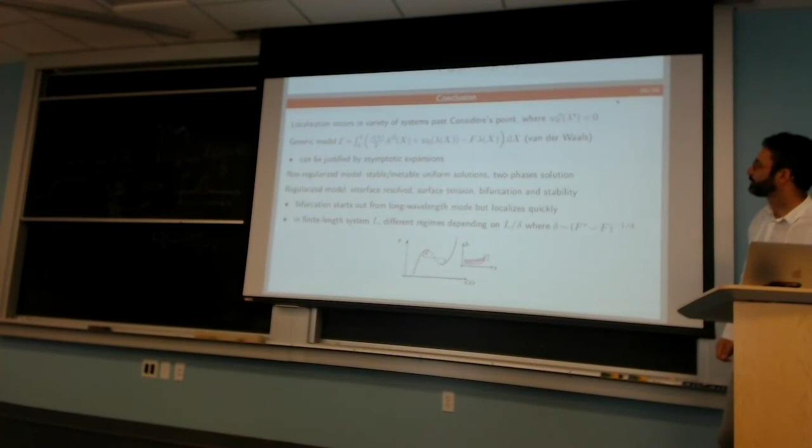Okay, so again, that's very useful to analyze all the phenomena we are discussing. I probably should end with a little bit of an open question, something that's not completely done. So something we're working on actively now is how we can apply this picture to the tape spring, which I was speaking of at the beginning. For the tape spring, the relevant strain would be the curvature. You can do all this analysis to build this kind of diagram. The main question is how you get from the shell equations to that 1D diffuse interface or van der Waals type of model.

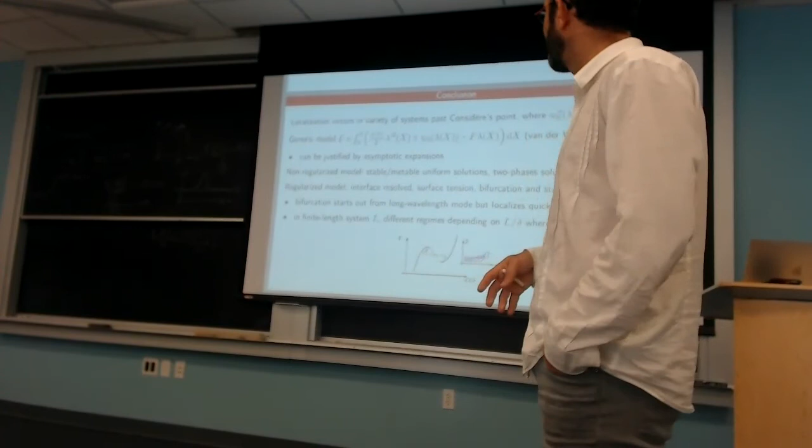So I'm done. I hope you enjoyed the lectures as much as I enjoyed preparing them. And I hope it opens up discussions with you guys. Thank you. Thank you.